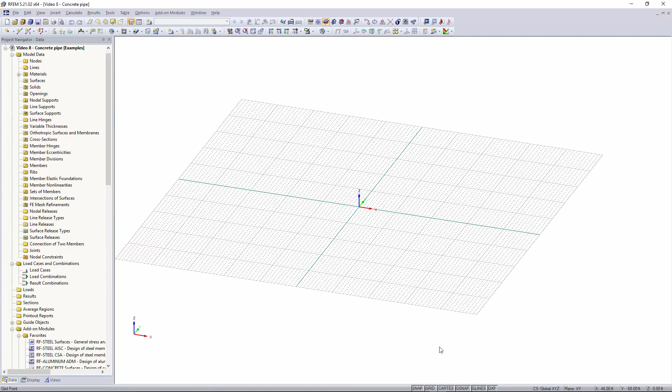Now you'll see that our graphical window is popped up with our grid. The first thing I want to do for this model is edit the grid spacing. I'm going to right click on grid, hit the edit button, and then you'll see this window pop up where you can edit your grid spacing and also the amount of grid points in each direction.

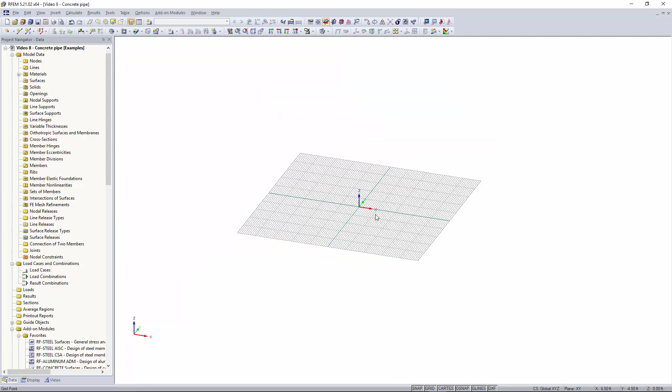I'm going to change my grid spacing to 1/2 foot. Now you can see that it's changed within the graphical window. I want to go up here and change my work plane. We're going to set it to the XZ plane.

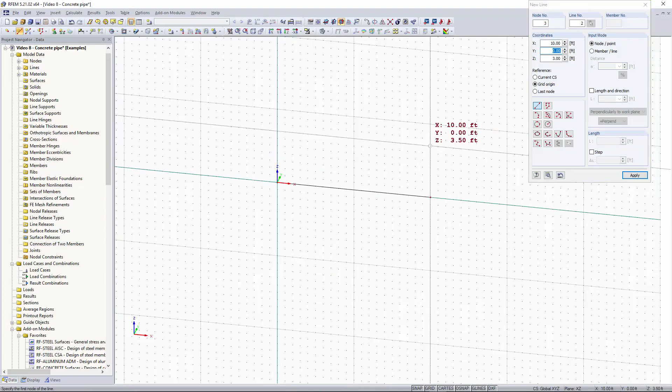I'm going to draw a line element, and this is going to be the center line for our concrete pipe. I'm going to make it 10 feet. Right click to cancel out of it. Now you can see we have our line along the global X direction.

Now I can go up to this tool up here. You should have a drop down window where you can select which types of surfaces you want to create, and you can see we have a surface tool called pipe. This allows you to create a pipe super easy.

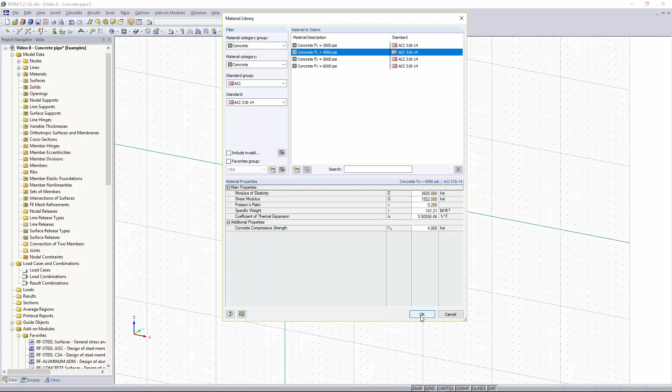The material we're going to set and go to import. We want concrete, and we'll set it to the ACI standard, then set it to ACI 318. Pick 4000 psi. And we want the thickness of our pipe to be 4 inches. Then we can set within this tab the radius of our pipe, and we'll set that to about 1 foot.

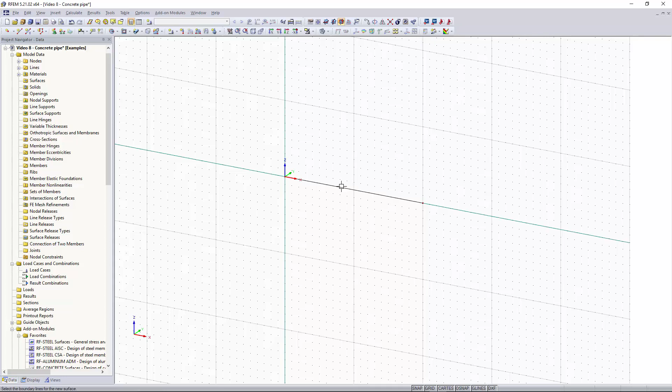Now you can see our cursor has a box next to it. That means we can select which center line we want this pipe to be created on. We'll click the 10-foot one, right click and cancel out of that. Now you can see we have our pipe.

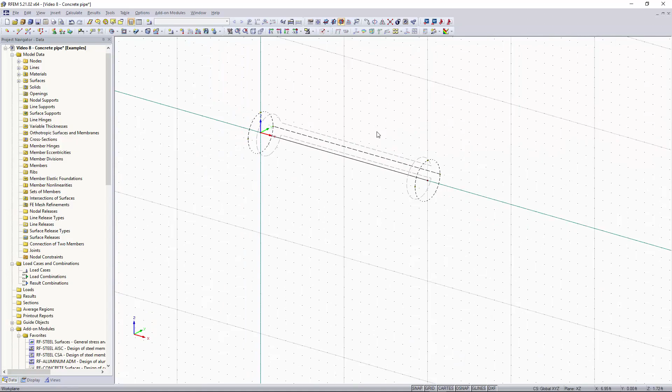So basically our pipe is made out of this one 2D surface just wrapped around that center line. You can see what this looks like and how it is defined just based on a wireframe view. Then we'll move on to how to divide this pipe into multiple surfaces for calculation purposes.

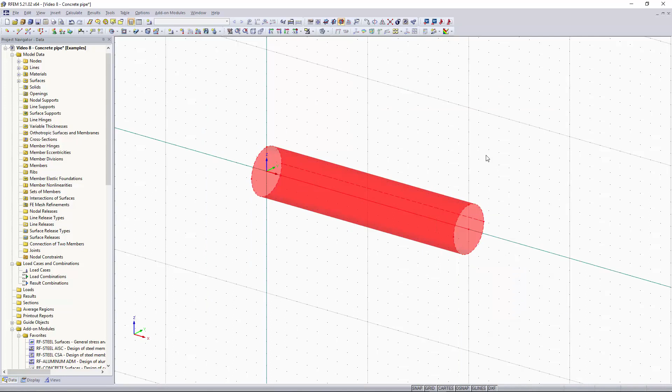I'm going to drag from right to left to highlight the pipe, then right click on it, go to surface, and go to split surface. You'll see that the split surface window pops up. It's taken our surface and divided it based on 2 different cross sections, and you can see we have 4 different quadrants based on this.

I'm going to keep all of this the same. You can see right here you can change your number of divisions for lines A and C and lines B and D. I'm going to click OK, and now you can see that those section lines have been applied and we have multiple surfaces defined.

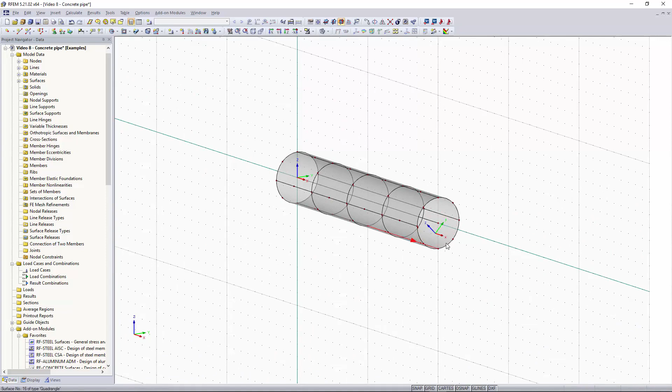Now I'm going to go back and add nodal supports to this left side, and add a rigid surface to this right side so that we can apply our loads to it. So I'm going to change my work plane up here to the YZ plane, and we can easily go up to new nodal support, keeping this as hinged.

Click OK. And now I can rotate and drag from left to right, select those end nodes like so, and then I can delete this middle node, nodal support.

And now we want to apply a point load and moment load to the front of this pipe. So I'm going to change my work plane origin by going up to this tool up here, set origin of grid / work plane, and I'm going to set that to the center point.

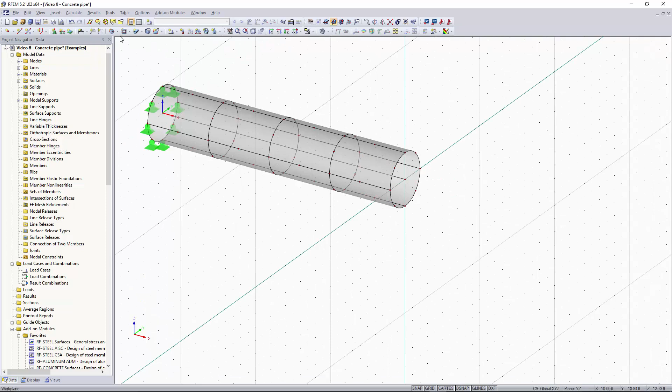Now I want to create a rigid surface, a circular one, so I can go up to this tool up here, hit the drop down button, hit circular, and right here we can set our stiffness to rigid. This creates an infinitely rigid surface. I'm going to click OK.

And now we can apply that to the end of our pipe. And there you go. Now you can see that our rigid surface is this pink color, and you can see that it differs from the gray color of our concrete.

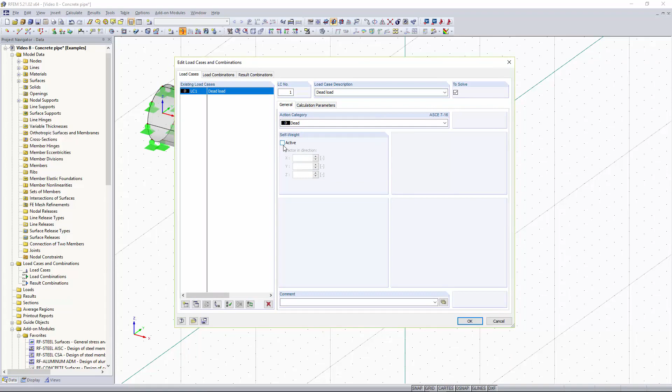And now I want to add those point loads and moment loads. So I'm going to go up here and click on point load. We haven't created a load case yet, so it's asking us to create one; I'm going to create a dead load case and just turn active self weight off with this checkbox. I'm going to click OK.

And then automatically our new nodal load window will pop up. I want this nodal load or point load to be pulling the pipe in tension, so I'm going to set it to the positive X direction. I'm going to make that 30 kips.

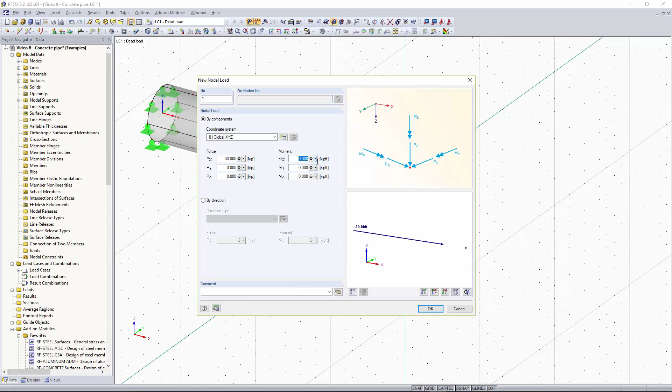And then I want a moment force or torsional force at the end of our pipe about the X axis, so I'll set that to 15 kip feet. I'll click OK. Now you can see we have a little icon next to our cursor, and I click on this last node on our rigid surface. Now you see that our loading has been applied to the end of the pipe.

Now that we have our loading and our supports added to our model, we can go up here and click Calculate All.

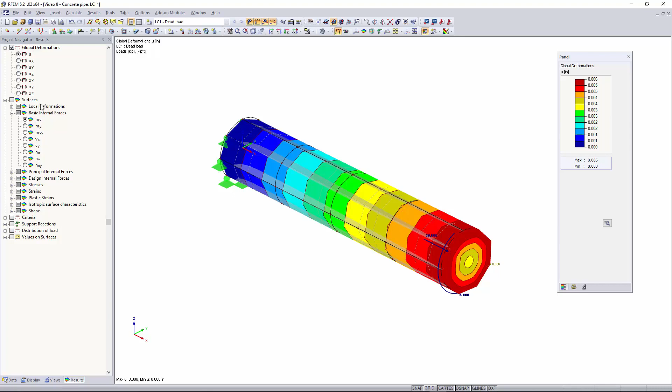Now you see that our global deformations are shown, and you might be wondering why our circular pipe looks more like an octagon, and that is something I will get into a little bit later. The max global deformations are shown on the pipe, and over here we can change our results to surfaces, and this will show the basic internal forces such as moment about the X direction and Y direction, shear, and axial forces.

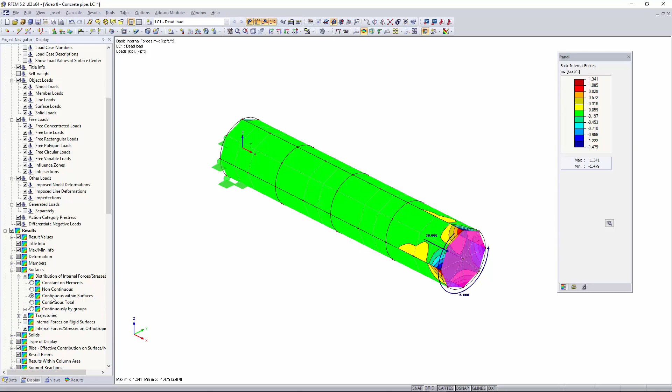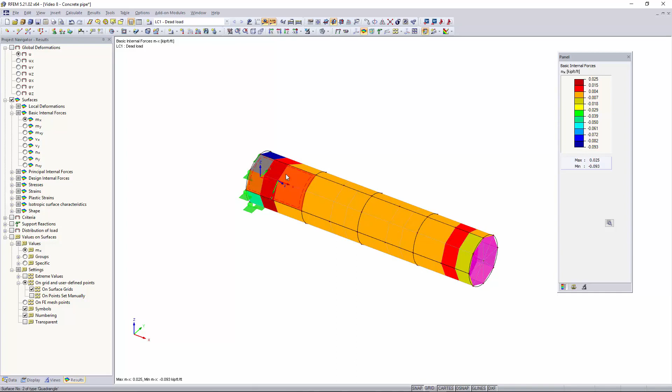So now we can move on to checking out the results. Right now we have our surface results turned on along with our basic internal forces, so I mostly want to concentrate on this one panel. To do that, I can go up here to this drop down and hit visibility by selected objects, and then over here I can turn on values on surface. Right now I just have my moments within the X axis direction turned on.

So I want to go down here and have extreme values turned off. I more specifically want to have internal forces and stresses turned on right now. Then under stresses, under that subtree, we can turn on our sigma x and y on the positive side of the surface, our torsional forces on the positive xy side, and then along with our sigma x and sigma y on the negative side of the surface.

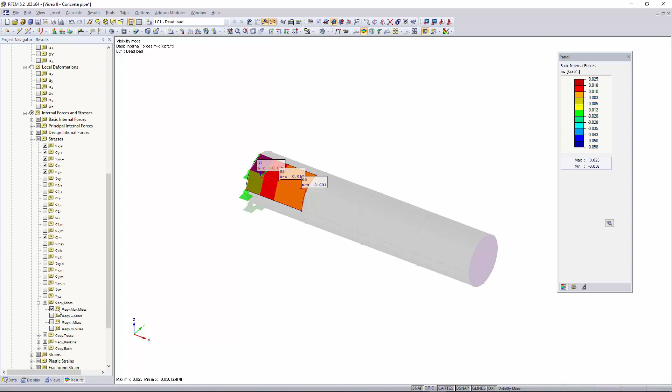We can also turn on our alpha sub m values, which gives us the angle between the local x-axis and the principal axes. And then we can also turn on our max stresses from our von Mises calculation, and as you can see, those are displayed on our surface. We want to also make sure that our specific tree right here is checked on.

So now you can see that with extreme values turned off and symbols and numbering turned on, we get these results at each of these points. You can see that all of our stresses and torsional moments are shown.

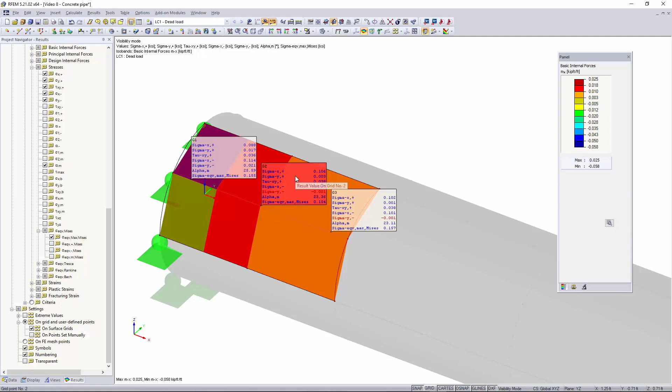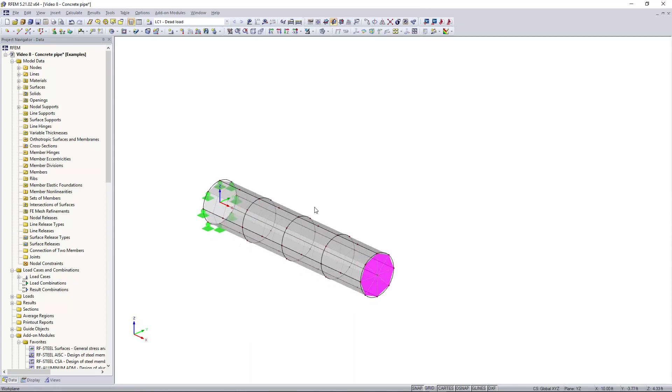So now I want to move on, cancel out this visibility, and turn off our results for a minute. Then I want to show you how to determine whether or not your finite element mesh is at the right length or not. So I'm going to highlight this whole model, and then go up here to our move and copy tool, and I want to make a copy of this model and then move it 10 feet in the Y direction.

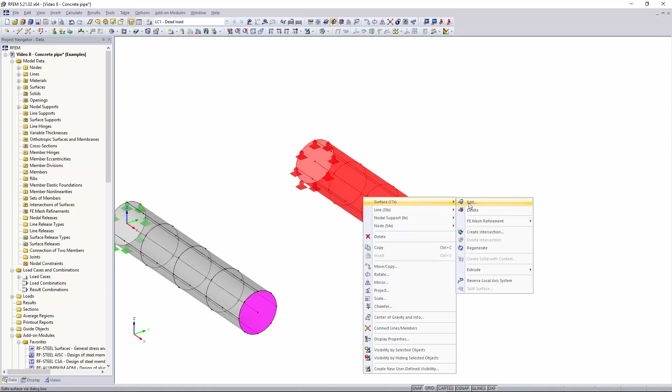What I'm going to do is add a finite element mesh to this entire model by highlighting the whole model, right-clicking, going to surface, and then go into FE mesh refinement, and we're going to hit new. Then we're going to create a new FE mesh refinement, and this one's going to be the entire surface. We want the target FE length to be 0.2 feet, so we'll hit OK again.

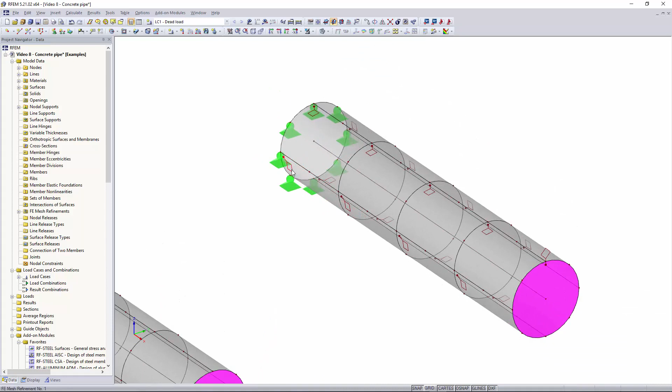Now you'll see these little box symbols telling you that the surface has an FE mesh refinement on it. Then we can go up here and calculate our results again. Our results are generated, and now you can see how much finer and how much better our model with our smaller FE mesh looks.

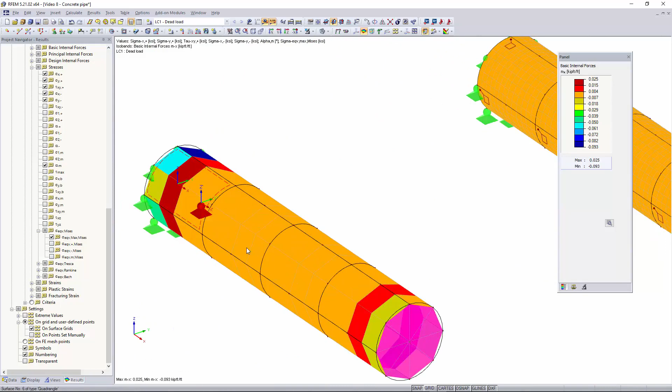As you can see, we had a 1 foot FE mesh over on this model, and on this model we have a 0.2 foot FE mesh length. That gives us a more accurate representation of our model with a finer FE mesh, compared to the more blocky FE mesh over on this side.

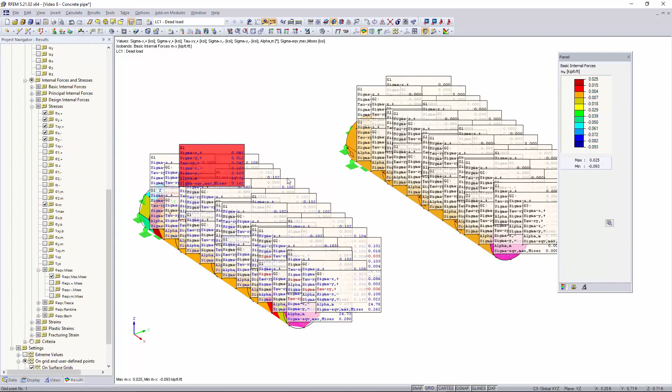So now let's view the results. Once we go under values and surfaces and turn on specific results, we can compare the results between these two models and see how much they differ. I'm just going to select one of these panels again.

So this is just a reminder when unsure about how large you should make your FE mesh: it all depends on the size of your model and the size of your surfaces. But if you change your FE mesh from one length to another and those results differ by a lot, then that means your FE mesh probably wasn't the right size.

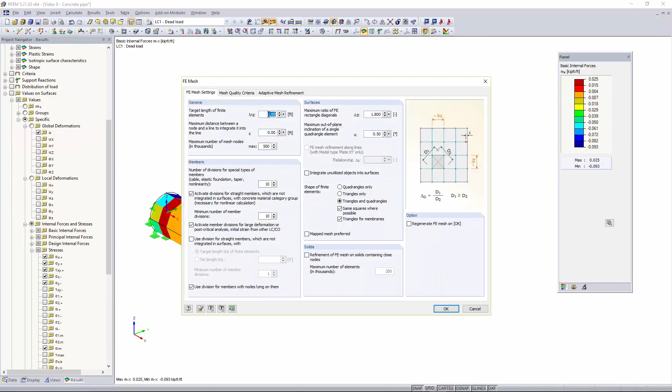If you'd like to change the FE mesh of the entire model, you can always go up to Calculate, FE mesh settings, and you can change your FE length right here, and that'll change the FE length of the whole entire model.